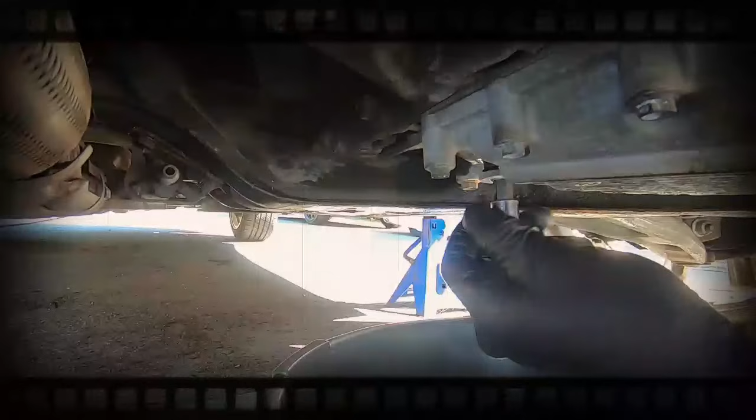Today we're going to be replacing the CVT fluid, dropping the transmission pan, cleaning it, and checking the internal filter, as well as replacing the external transmission filter on this 2014 Nissan Maxima. This should fall in line with any 7th gen Maxima, which is 2009 to 2014, so let's get into it now.

Alright guys, so we are under the hood here. These 7th gen Maximas did come equipped with a dipstick, which is right here. Now you can't just pull this thing up, it has a locking tab which has to be released in order for this to come up. So I do want to check the fluid, I do want to look at that before we do anything.

This is a 2014. It's 2024 at the time of this recording, so this vehicle is 10 years old. The mileage is 101. I don't know the history of this thing, I'm doing this for a friend, but I'll get into reviewing fluid intervals and all that at the end of this video.

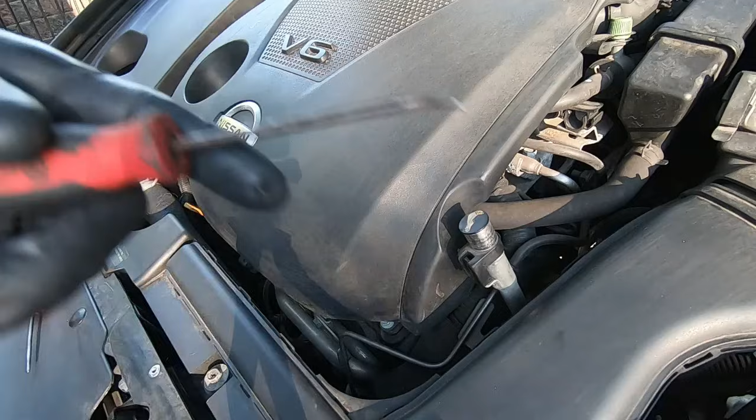But for now, the first thing we want to do is get this tab released so we can check the fluid. Alright guys, so what I have is the angled pick here. I've had success using this on other CVT tabs like this on Nissan. So what you do is there's a little tab in the inner part here.

On the inner side there's a little tab, and if you can see, I'm pressing it out. I don't know if you can see that clearance, that's me pressing it out. So now that I have it pressed out, let me see if I can put the camera down here, and I should be able to pull this thing straight up with that tab pressed back. It's slowly coming out guys, it's really fighting me. Jeez, that thing did not want to come out.

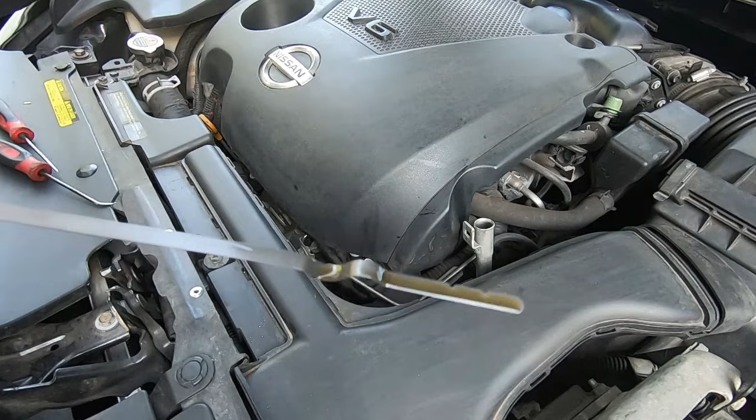Got it guys. Alright guys, this thing actually has fluid on it. We are going to check the fluid correctly, I'm going to review that in a minute, how to accurately check the fluid. But like I said, we did want to get this out because it is a pain. So just initially, we can see that there is fluid on here. I would go out on a limb and say it's original.

It's pretty dark, it smells like Nissan original NS2 or NS3 fluid. It has, if you've been around these fluids, they have a scent. Looks like it too, because this is about the color it would be if it was deteriorated and dark. So yes, I would go ahead and say that this is original NS2 fluid.

What I want to do is put this back in reverse guys. You don't want to put this back in with the locking tab on, because it's just going to lock itself again and it's going to be a pain to get back off. So put this on with a 180 turn and put it back that way so you can just easily pull it back out.

Now I'm going to be replacing this fluid as Nissan's factory service manual for this vehicle outlines. So if we look here, we're going to start with checking the fluid. Obviously we see we got some fluid on the dipstick, which is a good sign. Yes it is dark, but at least there's fluid on there. That's better than nothing at all, or pulling it out and it's dry.

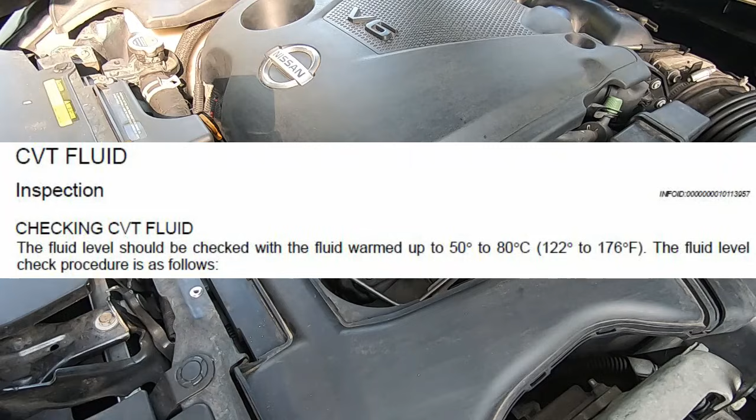So we're going to go ahead and start with the CVT fluid, checking the CVT fluid from the factory service manual. It says the fluid should be checked with the fluid warmed up to 50 degrees to 80 degrees Celsius, which is about 122 to 176 Fahrenheit. The fluid check procedure is as follows.

Okay, first it says check for fluid leakage. I haven't looked underneath of this thing, but just from a quick glance up top and looking down in here and everything, I don't see any fluid leaking, but we'll address that when the time comes.

But it says, with the engine warmed up, drive the vehicle in an urban area when the ambient temperature is 20 degrees Celsius or about 68 degrees Fahrenheit. It takes about 10 minutes for the CVT fluid to warm up to 122 to 176 degrees Fahrenheit. So if the car has been sitting for some hours, or sat overnight and the car is cold and you just came out and started it up, you would probably have to drive about 10 minutes if the temperature is roughly 68 degrees outside.

CVT fluid is widely affected by ambient temperature, which is the outdoor temperature. So if it's like 40 degrees outside, there's a good chance this fluid is going to be that when it sits overnight. 10 degrees outside, the fluid's probably going to be about 10 degrees. So let's say it's 30 degrees, you'd probably want to drive for about 15 minutes.

Now, there's also another way to check the fluid if you have an OBD2 scanner capable of reading CVT fluid temperature. You don't have to do that. Nissan gives you the option to check the fluid in that wide range of 122 to 176 degrees, and they simply suggest driving it around to warm the fluid up.

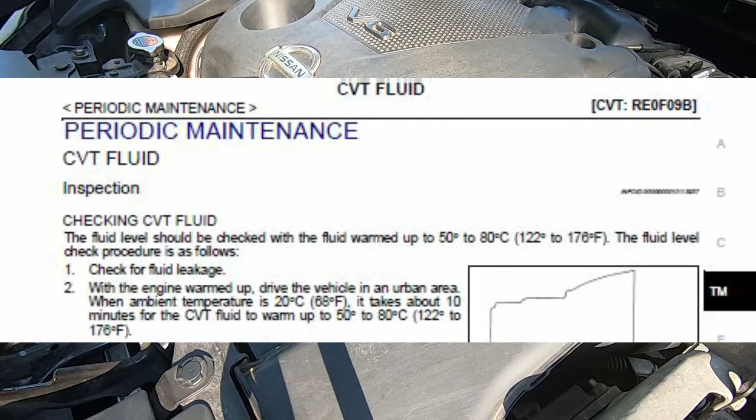However, I am also going to check the fluid temperature with an OBD2 device, just to get this as accurate as possible. I'd like to use a scanner to read the CVT temperature from the computer. If you look at my other CVT fluid video for the Altimas, the factory service manual actually recommends you look at the temperature and drain it and adjust it according to temperatures. So yes, you can drive this around to warm the fluid up before checking it.

Also, in addition, use an OBD2 scanner to check the CVT fluid, guys. So I'm going to do that now.

There are multiple OBD2 scanners you can use that would read CVT fluid temperature. If you had a high-end OBD2 scanner like an Autel or a Snap-on or something like that, it would be capable of doing it.

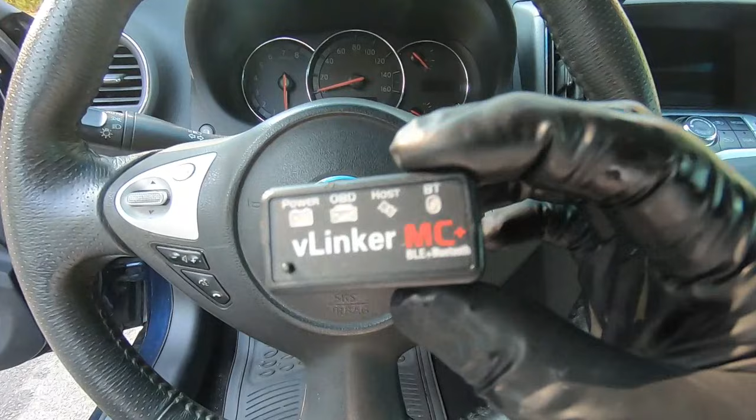What I'm going to be using is a Bluetooth BLE Plus device partnered with the car scanner app. I used a Veepeak BLE Plus scanner in my Altima CVT video - I actually left that in my girlfriend's Altima just so she has it, so if anything ever pops up she can plug it in and tell me what the codes are. I also have this vLinker MC Plus BLE Plus Bluetooth device. So you could use the Veepeak, or something like this. You just need a BLE Plus compatible Bluetooth device for OBD2. You can get these on Amazon, eBay, wherever. You need one of these to partner with the car scanner app in order to read CVT fluid.

So I'm going to go ahead and plug this into the OBD2 port. It's going to be right here underneath of the steering wheel.

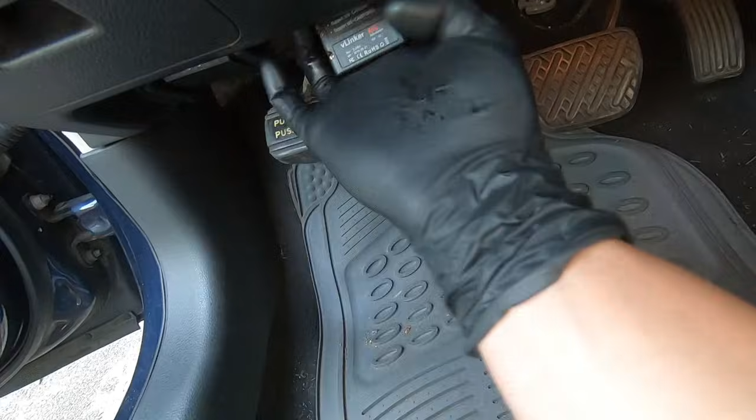All right, guys, got that plugged in. I'm going to go ahead and turn this to the on position. And now I can go to my phone and pull up the car scanner app and we can check the fluid temperature.

And just for reference, there is the mileage. Like I said, I don't think this has ever been changed before. Don't know the history on the car - my friend literally just got it. It's 10 years old, 101,000 miles on it. And like I said, just from the looks of the fluid, it looks like it's never been changed.

But we're going to go ahead and pull open the car scanner app here and we'll see what the fluid temperature is. All right, guys, hopefully this is looking okay on the screen here.

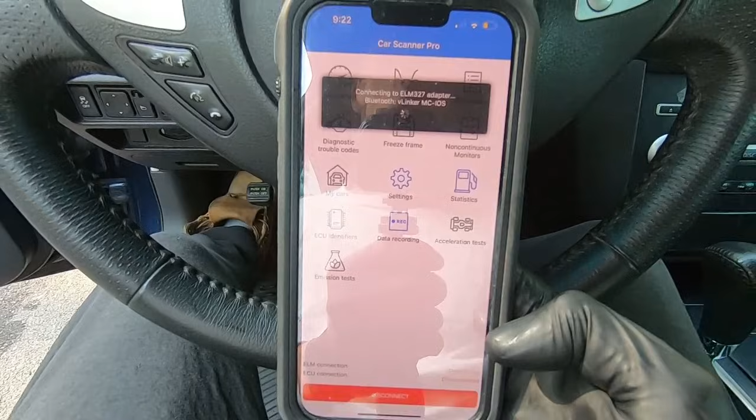So first thing you're going to do is connect the device. This is looking for either my Veepeak or my V-Linker. It is currently looking for the V-Linker, obviously, because that's what we have plugged in. But you could connect multiple Bluetooth devices in the settings and use multiple profiles for different cars on this app. This app is pretty legit - you can read a lot of live data, you can see any OBD2 code. It's pretty good.

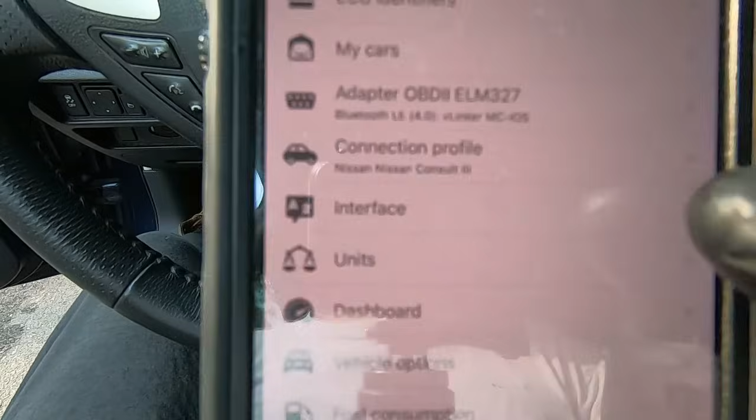All right, so we're going to first go to settings. Now you could choose the connection profile - you can choose what type of car it is. Like for the Altima, it'll say Altima CVT 2013 plus. You can also choose Maxima in the connection profile, but don't use the Maxima profile here because it does not read the fluid temperature.

If you're using the Car Scanner app specifically, go to settings, then connection profile. Do not choose Maxima, choose Nissan Consult 3. Consult is Nissan's OBD diagnostic equipment, basically their version of diagnostic tools. So use that profile, Consult 3.

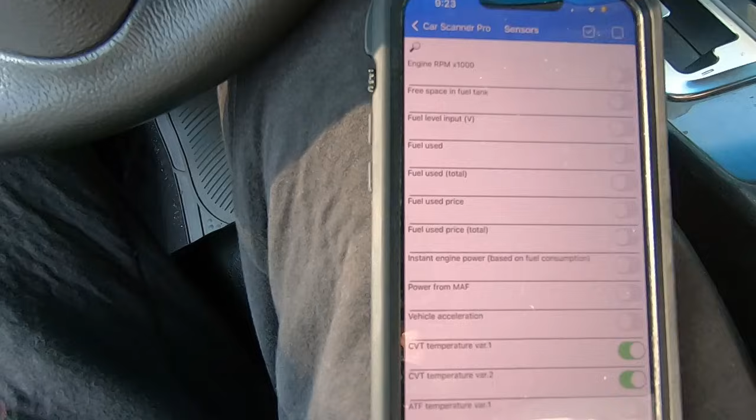So you can see we are connected up here. Now that we're connected with Consult 3, I'm going to go to live data. This shows you everything you can look at, multiple readings the computer brings up, voltages of different sensors, all that stuff. At the very bottom we've got CVT temperature variant 1 and CVT temperature variant 2. I selected both of them.

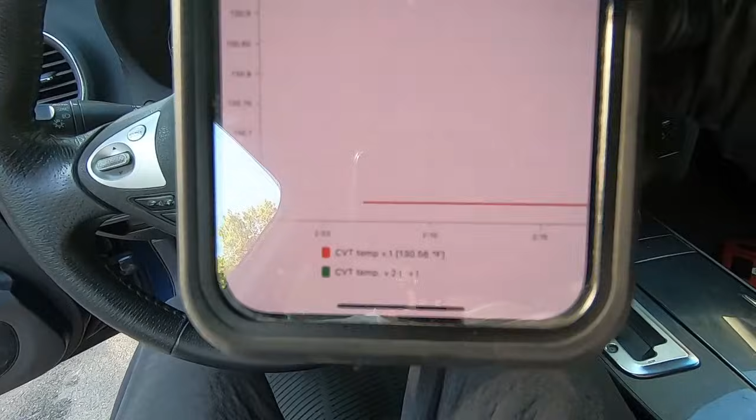It doesn't look like the bottom one reads anything, from the few times I've tried this. I did try this before to see if it worked before deciding to record. But as you can see, variant 1 is getting a reading. It's kind of hard to see, but it's at 130, okay guys? So we are at 130.

Now, like I said, this thing was driven for at least an hour to get here, so obviously the fluid's warm, that's why it's in this range. But if this car sat for 8-10 hours overnight, it would probably be close to the temperature outside, and right now it's about 70 degrees outside. So if this was cold, it'd probably be around 70 degrees because it's close to the ambient outdoor temperature. Now you can see it just slightly dropped a hair, so it's cooling off.

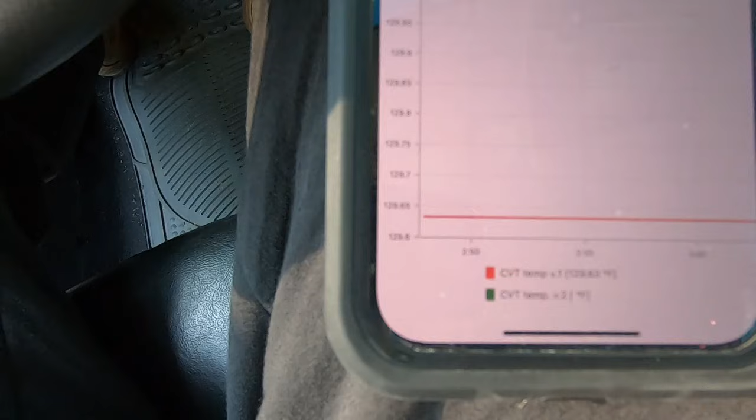Now, as it says in the factory service manual, you can drive this for 10 minutes if it's cold. You just need it in a range from 122 to 176, and that's a pretty wide range. So really they just want the fluid warm, but I'm going to get super specific since I have the opportunity to do so with the Car Scanner app. I'm going to get it exactly in between 122 and 176, which would be about 149.

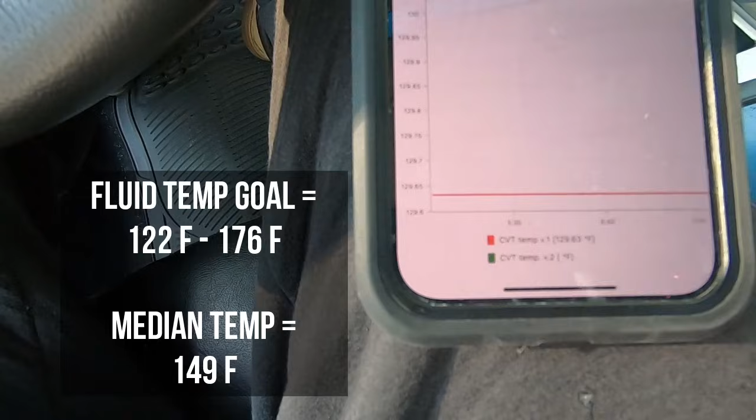So my goal here is to get the CVT temperature at 149. That's where I want to check it, and I want to also check it when we're done at that same temperature to make sure we get an accurate reading, keeping the data and temperature the same across the entire procedure. Just to keep it easy, we're going to keep it at the same temperature. It makes it a lot easier for reference. So that's what I want to do, guys.

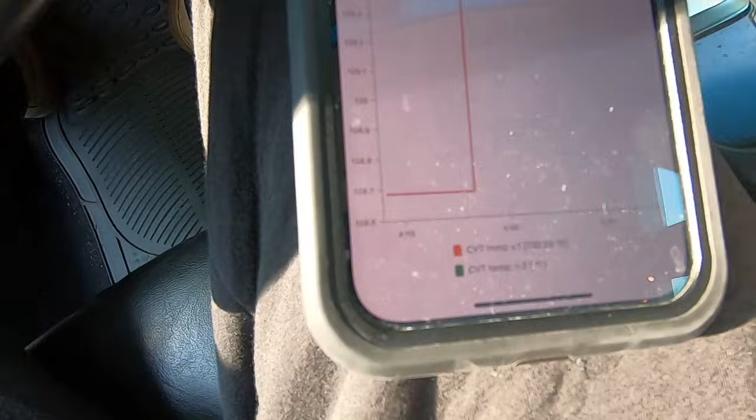So what we're going to do here is I'm going to start this thing up. Now if I start it up, it should probably start slowly climbing in temperature. It might take a few minutes to get to that point. I want to see how quickly it'll warm up, since it should just warm up at idle at this point from how close we are to 149. But I'll check back with you guys in a minute to see exactly how much this is warming up, because it's not even been a minute yet, and we're already up to 131. I'll be back with you in a minute and we'll see where the temperature's at.

Since this was already pretty much warmed up, I let it sit at idle for like 5-6 minutes and we're already at 148. So I didn't even have to drive it in this specific case, just because it was pretty much already warmed up. So we're at 148, probably 149 any second, guys.

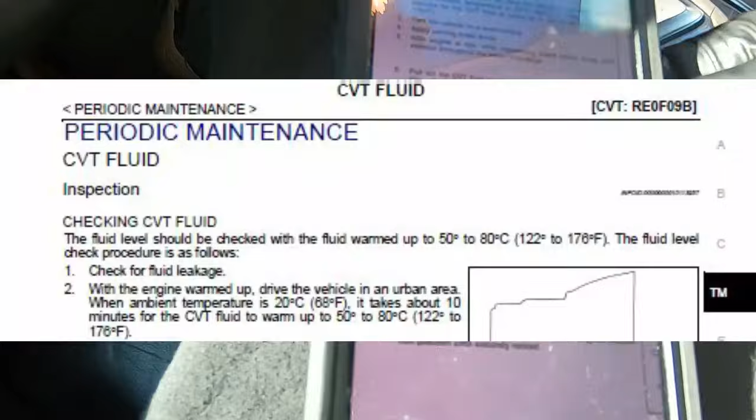So what we're going to do is take it back to the factory service manual. Now we've got the engine warmed up between 122 and 176, and as I said, I went right in the middle at 149.

So then it says park the vehicle on a level surface. If you've got a level driveway, you're good to go. I don't, mine's kind of on an angle, so I just put a jack under the front to get it even. So the car's, in my case, on a level surface just from jacking it up a hair. But if you've got a level surface, you're good to go.

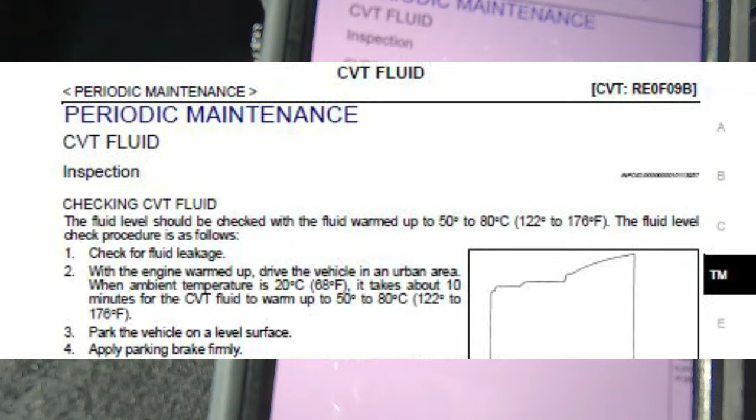Next step, number 4, apply parking brake firmly. I've got the e-brake on, so we're good there.

Number 5 says with engine at idle, while depressing the brake pedal, move the shift selector through the entire shift range. So I've got my foot on the pedal. We're going to go through each gear with about a 5-second wait in between, going all the way from drive to neutral to reverse to park, throughout the entire range, all the way down, all the way back up.

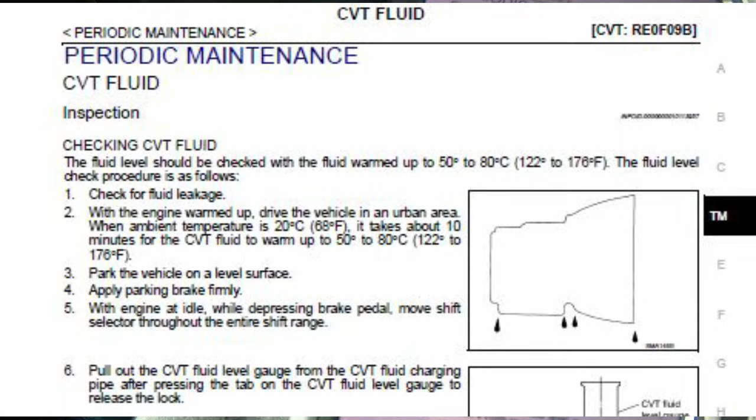Now we're going to go ahead and check the fluid, because number 6 says pull out the CVT fluid level gauge from the CVT charging pipe after pressing the tab on the gauge to release a lock. Well, we already released a lock because we're smart, so we don't have to go out there and fight with it for 5 minutes.

So we're going to get out of the car and see where our fluid level's at. Might be hard to tell, but I've got the car even just with a hair of jacking on the jack point. I'm going to put the camera down, pull out the level, and we'll see where we're at as far as the fluid level on this gauge at the correct temperature.

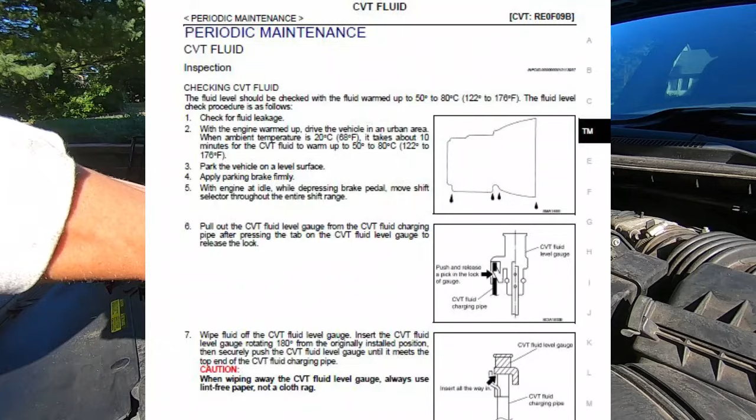So let's pull this dipstick out, wipe it off, put it back in, and we'll get our reading here.

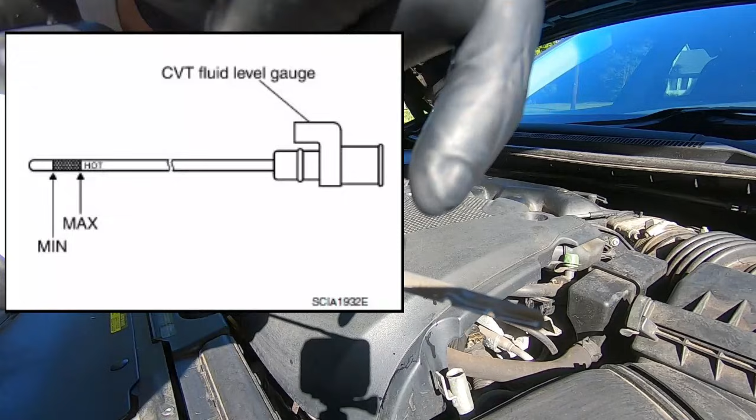All right, so it looks like we're within spec. Really, this cross-hatched diamond pattern is within spec. Right now this looks like we're getting fluid to about that point. So it does look like the fluid's in spec, and we're obviously going to check this again after we replace it to make sure it's in spec. But this is a good gauge to start off to see where we're at. Yeah, we're getting fluid pretty much all the way to the cutout right here.

All right, go ahead and put that back in reverse, don't let it lock in again. We still have to pull that out a few more times before this job is over. So now we're going to turn the car off and drain the fluid.

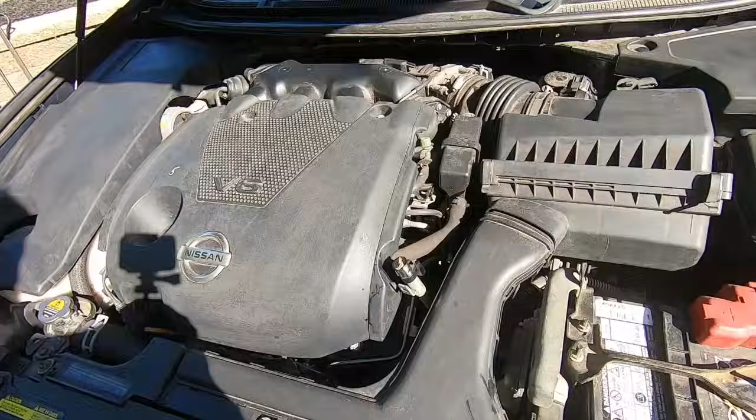All right guys, we just checked our fluid at 149 degrees. So now we've got our reading, we've got a gauge of where we're at. We're going to go ahead and drain the fluid now.

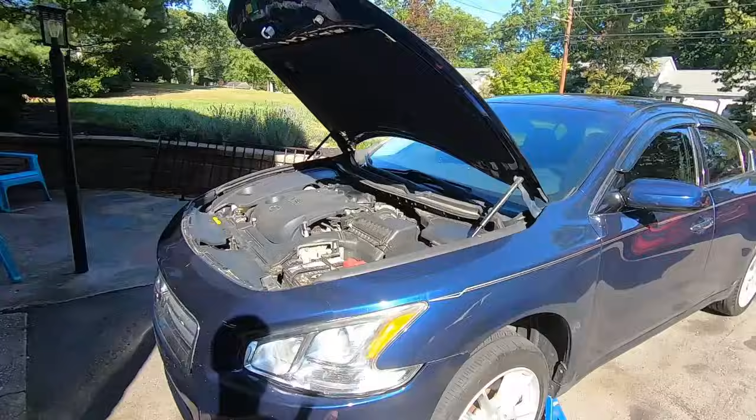So I've got the car jacked up on jack stands. You want it to be as even as possible. Like I said, I do have a slant in my driveway, so with me just putting this car on jack stands in the front, it actually evens it out. Instead of it being on a ramp coming down my driveway, when you put it on jack stands, it evens it out. Get it on a flat surface, and you can pretty much tell that this thing is even and flat with the jack stands on it. So with the front end in the air, in my case, I've got it even.

Car is even, so we want to go ahead and get under here. You want to come on the driver's side. The transmission is on the driver's side, and there is our transmission pan right there. That pan with all those lines in it, that is the transmission pan.

If we come under here and look right there, that hex, that is your actual drain plug. We need to crack that loose to drain this fluid. Now that is a hex bit, you could use an Allen key, whatever, but it is a hex 10. So I'm going to put a hex 10 on a socket wrench. I have an actual socket, that's what I'd suggest over an Allen key, but you can use what you prefer. There we go guys, that is a hex 10. We're going to crack that loose, get it free, and start draining the fluid.

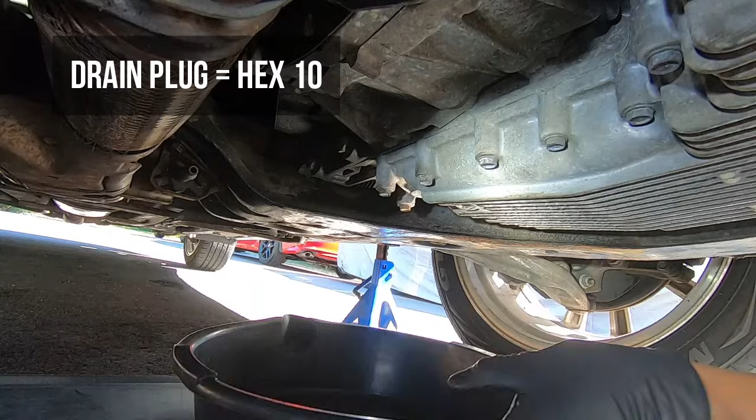All right guys, hex 10. I have an aluminum pan here on the ground for protection, and a drain pan underneath of it, nothing crazy, just trying to avoid making any messes if you can. So hex 10, I've got it on a 3/8 drive, an extendable 3/8 drive ratchet, so that should give me a little leverage to crack this thing loose. And she's pretty tight, oh wow, yeah, this thing is in here.

Oh man, yeah guys, this thing is in here. Hold on, I think I'm gonna have to grab out the half drive on this. All right guys, I'm gonna grab the 1/2 inch.

Really don't want to go this aggressive here, but gee, this thing is stuck. She does not want to budge. Oh man. Not good.

See, the thing is with this, I don't want to strip it because it's a hex head. I wish it was not a freaking hex head. You gotta tread really carefully with this, guys. This thing's definitely never been done before because this is not budging.

All right guys, I'm stripping the living crap out of this hex head. I would suggest buying a new drain plug. I should have thought of that when I did this. I forgot that these are hexes and not sockets.

So I'm really trying to get this thing hammered in. So what you want to do to avoid stripping this is get it in perfect, give it a couple even hammer blows. Pray for the best here. This is like my last shot on this, so if I don't get it, I'm screwed.

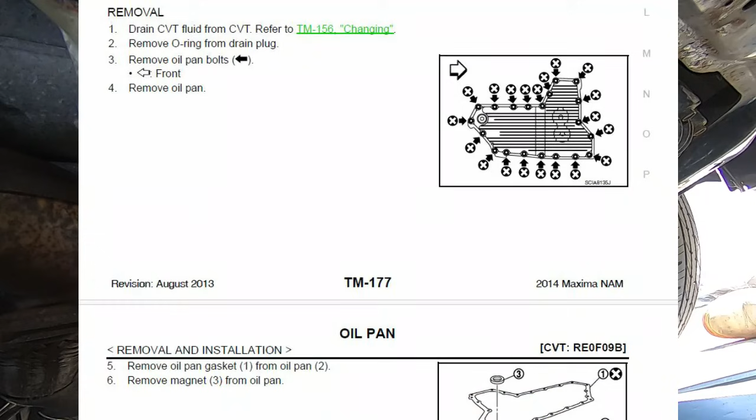All right, guys, I'm going to go ahead and get into dropping the pan, okay? So, if we're looking at the instructions straight from Nissan's factory service manual, they aren't too detailed. Pretty much, it says, removal and installation, removal. Drain CVT fluid from CVT. Obviously, we've already done that. Remove O-ring from drain plug. We will get into that. And then it says remove oil pan bolts, then remove oil pan, okay?

So, no specific order or anything this needs to be done in. They just need to be removed. There are 20 bolts surrounding this, okay? So we got 20 10 mil bolts all around this, holding this oil pan into the CVT, all right? 20 10 mils. So what I'm gonna do is I'm gonna take a 10 mil on a 3/8 drive socket wrench, and I'm just gonna crack all these loose, guys.

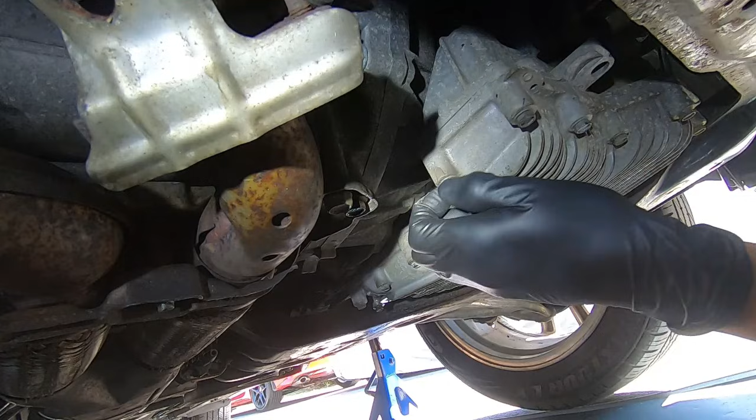Now, could you use a small impact or something of that nature to get these out? You most certainly can, all right? I prefer, with something like this, to tread safely and just crack them loose with the socket wrench, just to be careful.

Now, one thing I do want to note is it says these are one-time use and to buy new bolts. You could do that if it makes you feel better. If you look at forums, many people who have done this before me reuse these bolts. They don't look like anything fancy, could be torque-to-yield, I don't know, man, but we're going to reuse them. I've reused them on other Nissan applications and never had an issue. So we are going to reuse the bolts. If it makes you feel better, you could buy 20 new bolts as recommended by Nissan.

So let's go ahead and get the rest of these off. I'm going to crack them all free with a 3/8 drive and a 10 mil, and then I might just fire them out with the impact, just my preference, and then we'll get the oil pan off.

All right, so I got all 20 of these loose. What I'm going to do is fire these out with the impact since I broke them all loose and none of them felt trouble, they all felt okay. I'm going to leave the 4 corners in here loosely - this one, this one, this one, and this one back over here. Take the rest out just so we can separate this without making a complete mess once all of them are removed. We'll separate the oil pan from the transmission with these 4 still in, and then we'll drop the oil pan. So we're just going to go around, fire all these out with the impact, and then we'll get this pan dropped.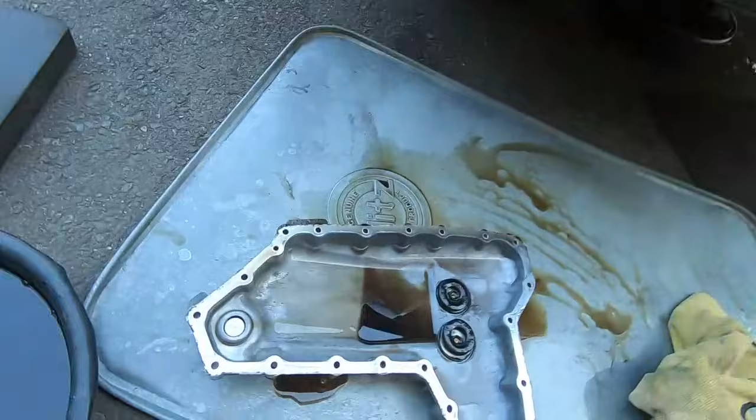All right, guys, so our pan is off. I just dumped the oil that was left over in the pan into my drain pan, and you can see this oil is pretty dark. Definitely looks like original NS2 fluid, so I do believe this is the original fluid.

You see how dark it is. We got probably a little bit more than 5 quarts out now, considering that we dropped the pan, and we are going to lose a little bit more fluid when we do the filter on the side of the transmission, which is the external filter. So definitely suggest at least getting 6 quarts of NS2 in order to ensure you have enough fluid to accurately fill this up and get the fluid level right once you're completed and replace the fluid.

Now, if we're looking at this, it's pretty clean, guys. I don't see any really metal shavings anywhere. I mean, there's a little bit of stuff here on the magnets, of course, but it's not a mess, man. It's really not. And we should be able to go ahead and pull these bad boys up here.

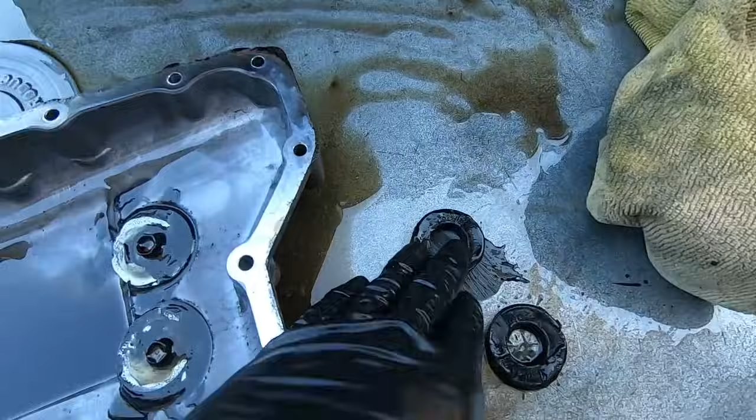Yep, 1 and 2. Definitely want to clean those things up. But I mean, guys, they're at 100K. I'm not mad at this, man. It looks pretty good. It's actually pretty clean considering. So yeah, looking good, guys. I don't see a bunch of mess, a bunch of shavings.

So really what we need to do here at this point is clean everything up. We're obviously going to be reinstalling the pan. I got a new gasket, so we got to clean the mating surfaces up, both on the transmission itself and on the pan. We'll clean the magnets, get all this cleaned up, and then we'll get this reassembled, guys. Now, before I do that, I will touch base on the filter, the internal filter that is in the transmission pan, guys. So let's go ahead and get under the car real quick. I'll touch base on that, and then we'll get this back together.

All right, guys, so inside of the transmission, hooked to the control valve, there is this filter that is surrounded right here, with these 10 mils and this neck right here. That neck is what sucks up the fluid. So that is a filter. According to Nissan, this filter is non-serviceable. In fact, they go to great extent to even hide this filter. You can't find this filter from Nissan themselves anywhere.

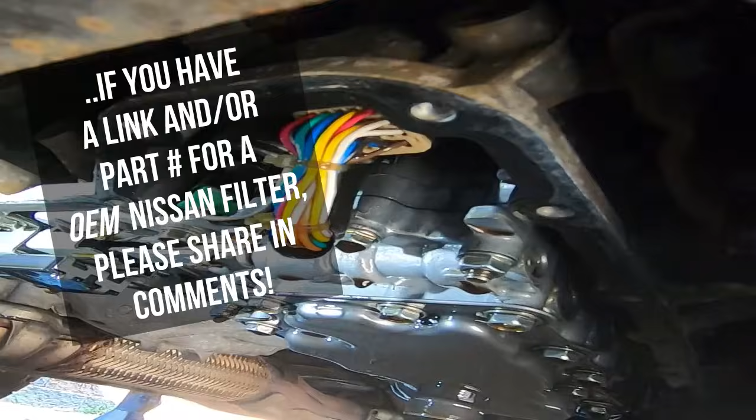Now, I did a good amount of research on this. I put some hours in, and what I came up with is I found one listing on eBay for this filter, and it's the only Nissan part number I found associated with this filter. I don't even know if it's real, but upon looking at it now, comparing it to this filter in the transmission, it looks real.

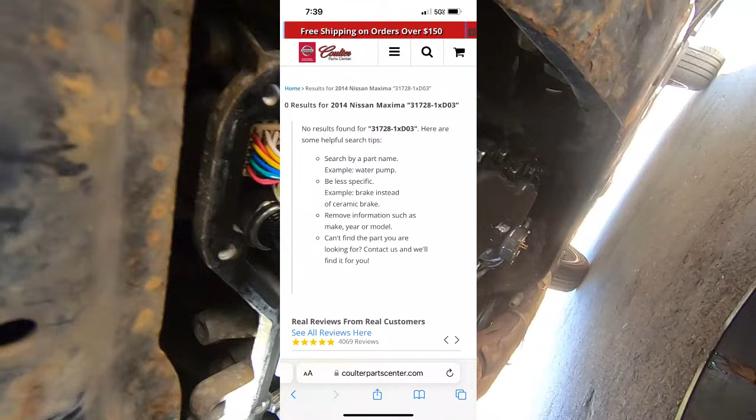Now, they have the part number here listed at 31728-1XD03. Now if you Google search this part number, or if you search the part number like on an OEM part site like Coulter Parts Center, for example, it does not generate this filter. Coulter Parts Center is the parts site where I get all my OEM Nissan parts from, and when you put in 31728-1XD03, it comes back with 0 search results.

Now, also, just upon searching and looking at other sites, I would put this part number in, and it would bring up the new filter for like the Altima transmission with NS3 on some other sites, and that part number is almost identical. It's 31728-1XF03, but that's not the filter that we're looking at right here. So either, when you're searching that OEM part number for this specific filter, it either generates no results or it brings up the newer filter, which isn't this filter.

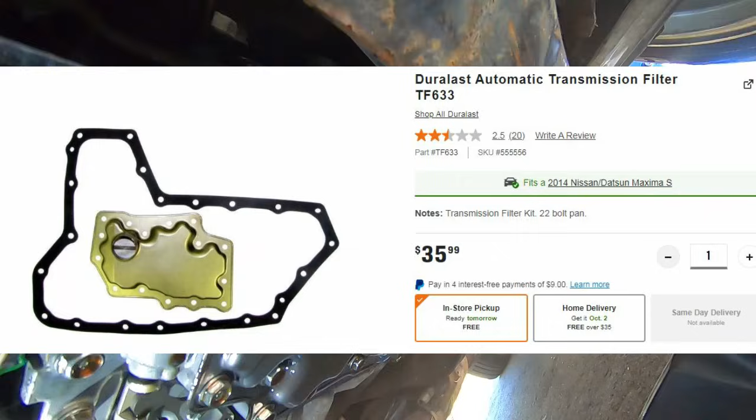Now, as far as the aftermarket, you can get these filters on Amazon. You can get it from like an AutoZone with a transmission filter kit, but they are not right. Now, if we're looking at this from the side, do you see how slim this neck is coming out of it? If we look at various different aftermarket options of this filter, these necks come down way far, like it's almost double the length. And that is a huge problem.

And if you do some research, you can see on forums, people have replaced these filters, and then the transmission won't shift because the neck is so long, it pins itself up against the transmission pan, and it can't suck up fluid. Okay, so I did find on one forum, and you know, I saw it and I should have screenshotted it, and of course I spent like an hour trying to find it again, and of course I can't find it.

I did find somebody who replaced this filter with an aftermarket one, and of course it was too long, but they cut it themselves accordingly. They probably just took a Dremel with a cutting wheel and cut it to the right size. You could do that if you want.

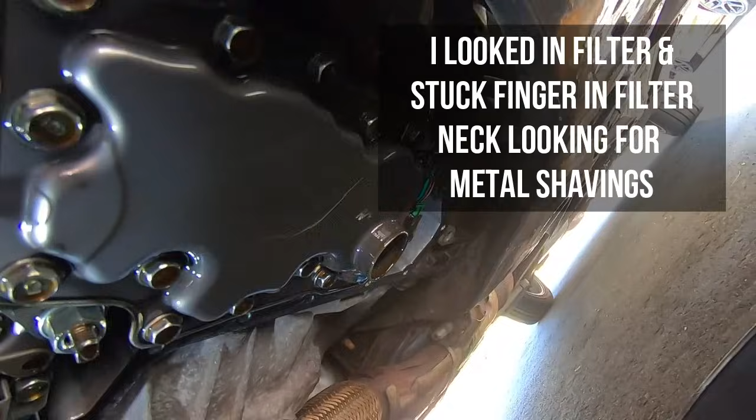Me personally, I'm leaving this alone. This isn't my car. It looks pretty clean in here. I don't see any metal shavings or anything that looks really out of place or bad. So I'm not messing with this filter. I'm not taking it down. I'm not cleaning it. I'm not messing with it.

If you want, you can drop it and clean this particular filter up. Now, if I could get the OEM Nissan filter, if I could literally search that part number and get that part readily available, I would probably swap it. But since it's not, and all the aftermarket ones, no matter where you get it from, have a neck that's too long and won't fit, causing the transmission not to shift, I say leave it alone, okay?

Like I said, if you want to drop this and clean it, be my guest. This isn't my car, so all I'm getting into is cleaning the pan and the magnets, and I'm leaving this filter alone. So this internal filter, that's my two cents on it. I put in a ton of research, and that's what I came up with. Take it for what it's worth, and do what you feel comfortable with. Not my car — I feel comfortable leaving this in. Everything else looks good. I'm just going to clean the pan and leave this filter in, but there's some insight as to the internal filter.

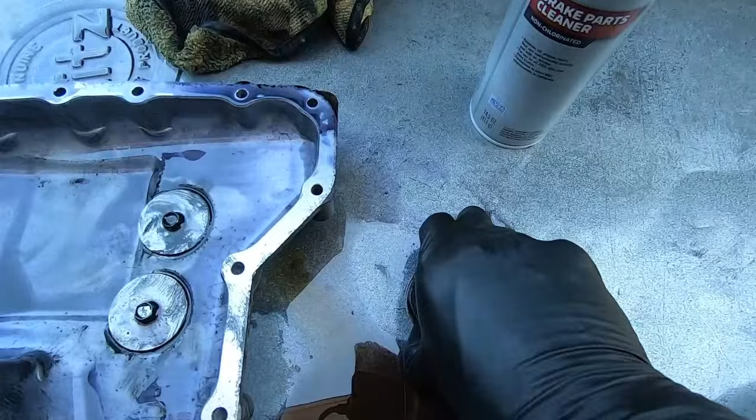All right guys, so we are back to the pan. I'm going to clean this pan up and the magnets. You can use shop towels, paper towels, microfiber. I'm going to get in here with some brake cleaner, clean this all up, get it real clean, spray it all down. We're going to clean these magnets up — they're kind of stuck here to my aluminum pan, but I'm just going to wipe all the debris, gunk, and nastiness off of them, then spray them down. We'll clean this up, spray it down, put it all back together, and then we just have to clean the transmission side, and then this is ready for reassembly, guys.

So I'm going to go ahead and get this cleaned up. Brake cleaner, towels — really all you need. Let's get this clean and we'll get into the next step.

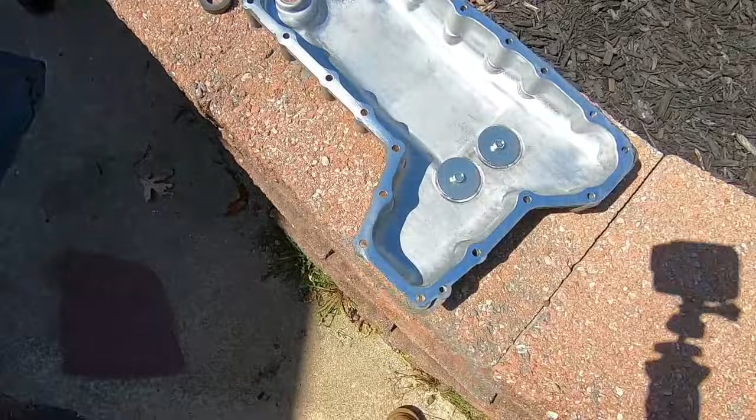All right guys, so I got the pan here, the magnets and the bolts all brake cleanered and wiped down. Just brake cleanered it, wiped it out with a microfiber, came out pretty good. Now you do want this to dry really well, make sure it's dry as a bone. It even says in the factory service manual to make sure all moisture is removed from the pan before putting it back together. So definitely letting this sit out in the sun just to make sure we got no residual fluid, brake cleaner, whatever in there, just to get it as best as possible.

Now, one thing to finish this off is I'm going to prep this mating surface. You can see there's just a hair, a little bit of gasket material and stuff on these edges. What I want to do is take some red Scotch-Brite, and I'm just going to go around the entire edge with this, with a little bit of degreaser in it. You can use brake cleaner, degreaser, whatever you prefer. Just want it a little bit wet, damp, and you can see it's taking it right off. That's how I'm going to go around the entire edge of this pan, and then it will be completely prepped and ready for install, guys.

So I'm going to go ahead and go around this edge with red Scotch-Brite, and this pan will be ready, good to go, ready for installation.

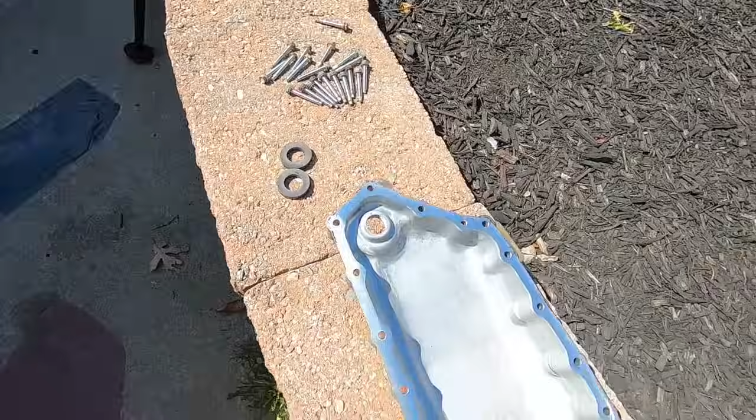All right guys, I got the mating surface here for the gasket on this pan all squared away — red Scotch-Brite the entire edge. Now you might see a little bit of oxidation here. It's nothing at all, nothing to be concerned about.

It's just a little bit of oxidation. There is no gasket material left behind, and that's what you want to go after. So there was a little bit here like you saw that I was working on. That's what you need to get off. The gasket material itself, I got all of it off here with some red Scotch-Brite. So pan is good to go.

I'm going to sit here and let the bolts, the magnets, and the pan marinate in the sun just to make sure it's dry, no moisture. And now we're going to go ahead and get under the car, clean up the mating surface on the transmission itself, and then we'll get this back together, guys.

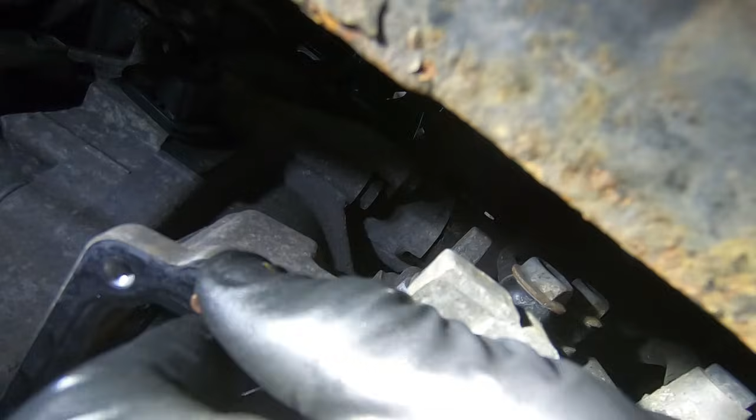All right, guys, we are back under the car now. We need to get this mating surface here on the transmission itself all squared away. Now, the gasket itself did not come off with the pan. It's actually still here on the transmission, and if you can see, probably maybe around this dowel or something. Let me see. Yeah, you can see it's on there. All right, so let me see if I can get a better angle here. You can see it coming off.

So I'm going to try to get under here with a plastic razor blade and get this separated all the way around, and hopefully I can get this thing off in one piece because I don't feel like fighting it and scraping it off all the way around.

All right, guys, so let me grab a plastic razor blade. I would suggest having some. They're great for many different automotive applications, guys. Plastic razor blades are always your friend when you're doing gaskets and scraping off material and things of that nature. So I'll see if I can get this separated and we'll see where we're at, guys.

All right, guys, let's see what we got here. Yeah, I got the plastic razor blade underneath of it, guys. So if you can see, I'm kind of just guiding it around underneath and just pushing it through as I go along. It's going to be a tight edge right here. Might have to turn it back to the razor blade side, but I'm going to just try to get underneath this entire thing. See how I'm going along the edge with it?

All right, she's going. All right, guys, I dropped my blade around that dowel. I did get it off around that dowel just by a light pull. Don't go crazy, just give it a light pull. It's a little tighter over here on this driver's side of the transmission, but this thing's coming, guys.

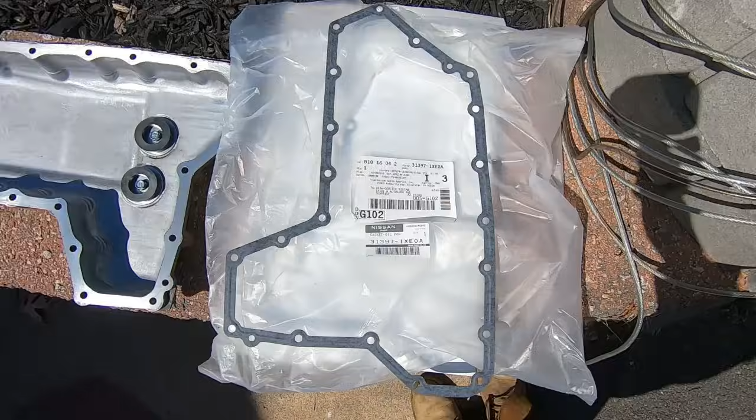Now, of course, you need a new gasket to go back together. Here is the OEM new gasket for our pan. As you can see, it is a perfect fit. This is an OEM Nissan gasket. Good to go. Here is the part number: Nissan 31397-1XE0A. That is the part number for the new gasket. So that is our new gasket. Pan is ready to go, magnets installed.

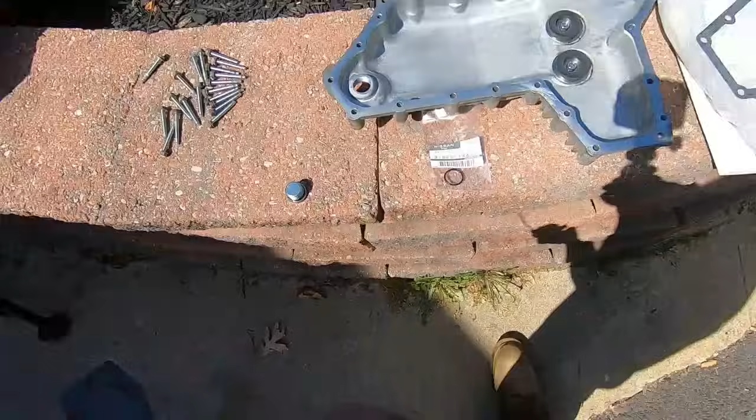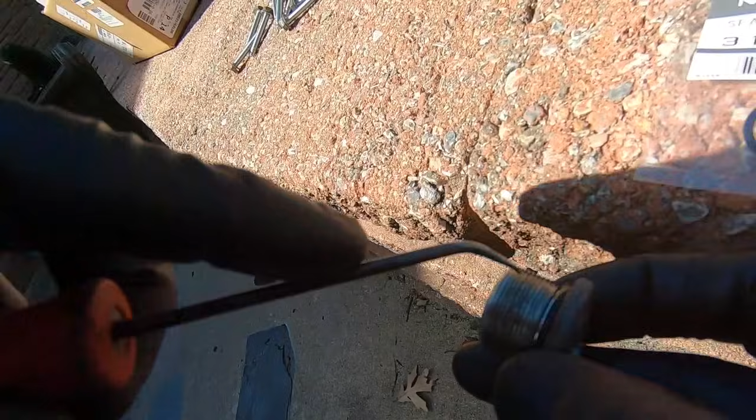Let's get this thing back together. One last thing we're going to do before we put this pan back in is put the drain plug back in. I'm just going to loosely tighten it. I'm going to torque it to spec once we're done, but if you notice, this does have an O-ring on it, which is basically the washer to prevent leaking from the drain plug. You definitely want to replace this, so we're going to get the old one off. I'm just going to take this angled pick, get behind it, and pull it off. There we go, old one off, and here is the new one straight from Nissan.

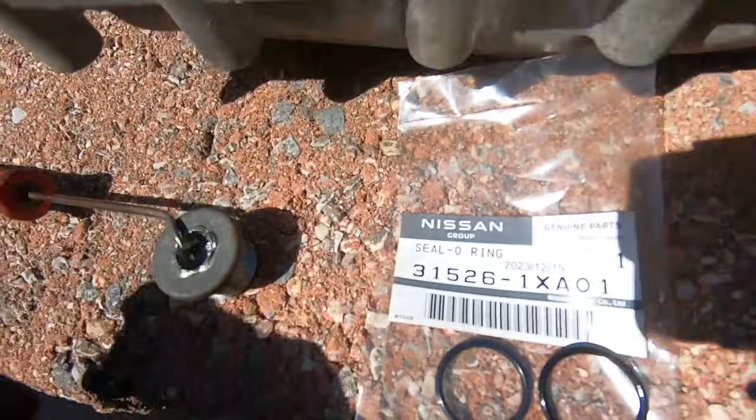As you can see, it's the same thing. Part number 31526-1XA01. That is the OEM rubber washer for the drain plug. We're going to go ahead and get this thing on, right over the body of the drain plug, and we'll be good to go. New washer here, just gonna get it to go over the body of the drain plug, right back into the bottom portion there.

It does recommend putting CVT fluid on that. You should always lubricate O-rings anytime you put one in, no matter the application. So I'm just going to put a little bit on my pinky and lubricate it, and we'll get that thing screwed in finger tight. Just a little bit of CVT fluid on that for lubrication, and I'm just going to finger tighten this bad boy back in.

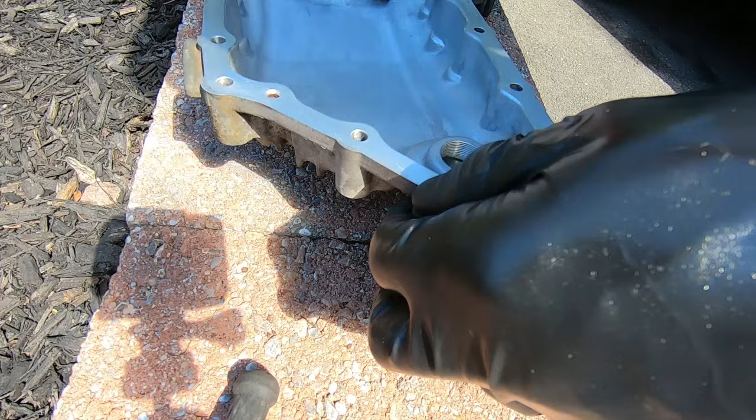I would definitely suggest getting a new drain plug. I did not order one for this job, and I surely wish I did, because I definitely chewed up that hex head, but it is what it is. I'll get it right, and if I ever have to get it off again, I'll be able to do so. But definitely, just for a fresh start, buy a drain plug. Wish I had one and I didn't get it, so I'm just finger tightening this in by hand, and I'll torque it once it's on the car. There we go, finger tight, and now the pan is ready for install.

All right, time to get this thing back together. I would recommend going around the edge one more time just to make sure that edge is dry and good to go, ready for installation. You can use a shop towel or a microfiber, just go around that edge. Now you're probably going to have fluid consistently dripping out of that neck there, it's pretty much unavoidable. Also, fluid likes to come right back here, so right where my finger's pointing, you need to make sure you get a microfiber up in there and dry it good. You might have to do it more than one time.

So what I'm going to do is drop the gasket onto the pan, and I'm going to mock it up, and then we'll push that pan back up onto the dowels and start threading in finger tight all of our 20 bolts. Got to work quick here.

All right guys, I'm going to put a bolt right here in the corner. That's how I'm going to start this thing off. Try to get it finger tight, get it going. All right, I got that in there. I don't think it's right, but nonetheless, it's in.

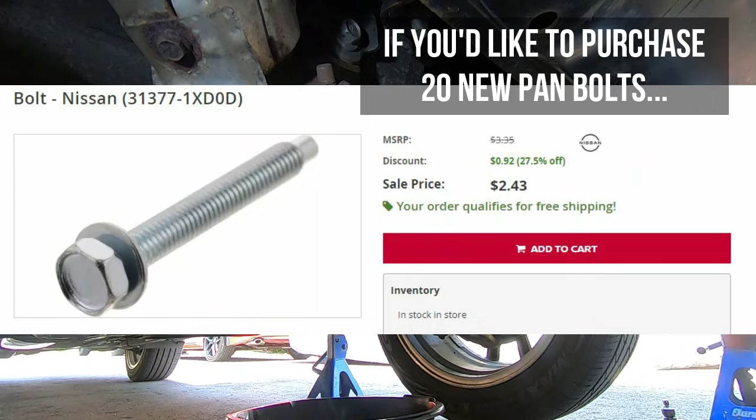Okay, it does say do not reuse the oil pan bolts. I already touched base on that, I'm reusing them. I'm sure some expert in the comments is going to tell me how the CVT is going to fail on the head, guess it's going to blow up because I reused these 10 mils, but all good. I see no issue. And like I said, if you do your research on forums and actually put in some time, you'll see that other people have done this successfully with reusing these bolts.

Now it says tighten the oil pan bolts in a crisscross pattern to the specific torque. So anytime you don't have a specific torque diagram that has each bolt numbered, you just crisscross the pattern on whatever it is. So in this specific instance, there is no specified torque sequence with the outline diagram, it just recommends to do them in a crisscross pattern.

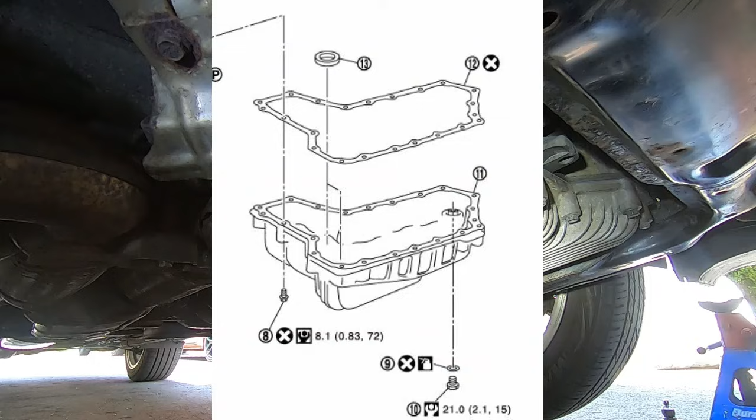So here is the blowout from Nissan's factory service manual. Now the torque spec for these 10 mil transmission pan bolts is 72 inch-pounds. So we're gonna go ahead and go in a crisscross pattern, torque each of these to 72 inch-pounds, and we'll be good to go as far as this pan's concerned, guys. So let's go ahead and get this thing torqued to spec.

All right guys, so what we're going to do is basically just be going diagonal, caddy corner to each opposite bolt. So I'm going to start here in this corner closest to the passenger side, almost at the center of the car, 72 inch-pounds. I'm going to come up to the front here closest to the driver's side, get this one to 72. Okay, torqued. I'm going to come back to this back one here.

So I'm going to come back to this one back here closest to the driver's side on this corner, get this one torqued to spec. Torqued, and then we're going to come up to this front one right here closest to the passenger side and get this one torqued to spec, 72. All right, so now I'm going to go to this middle one here in the back.

And you'll notice probably some of your finger tightness getting a little bit looser now that you're actually pulling it in with torque. So it just needed a eighth of a turn more with the hand so I can have a good start to this torque. So let me get this one going.

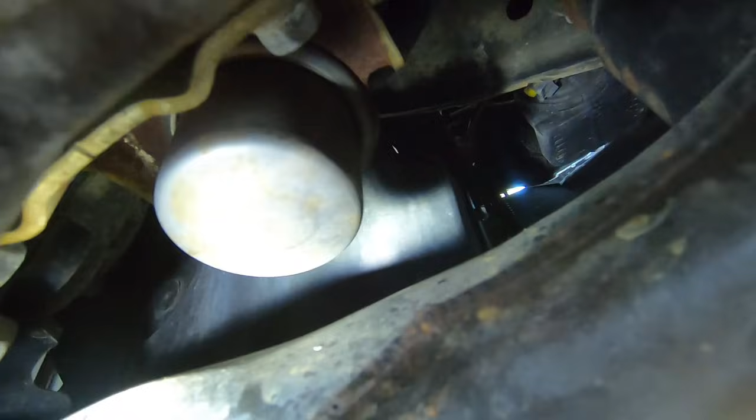Okay, so before we get into it, I'm going to go ahead and show you where it is. Now if we come next to the transmission pan, I'll put some light in here. You can see right there, that is a filter for the CVT, an external CVT filter. So what we're going to do is get to that real quick, and then we're going to get that replaced. Then we'll have this job basically done, and it'll just be time to replace the fluid, guys.

So we're good to go. Let's get to the driver's side, and we'll get this external filter replaced. All right guys, so we're going to replace that external transmission filter. Okay, so we are here on the driver's side of the car. We need to remove the wheel in order to access it.

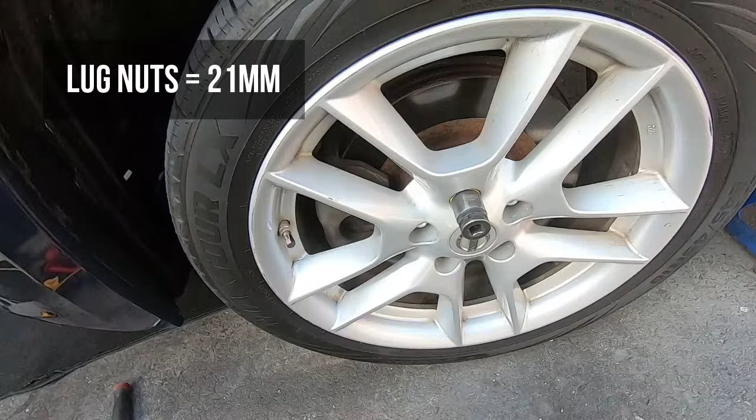Okay, so the lug nuts here are a 21 mil. I just have a 21 here on the impact. As we know, the car is already jacked up, so we're good to go. I'm just going to fire these 21s out with the impact, and then we'll be good to go, guys. I'm going to get all 5 of these out, and then we'll get this wheel off. All right guys, wheel is off.

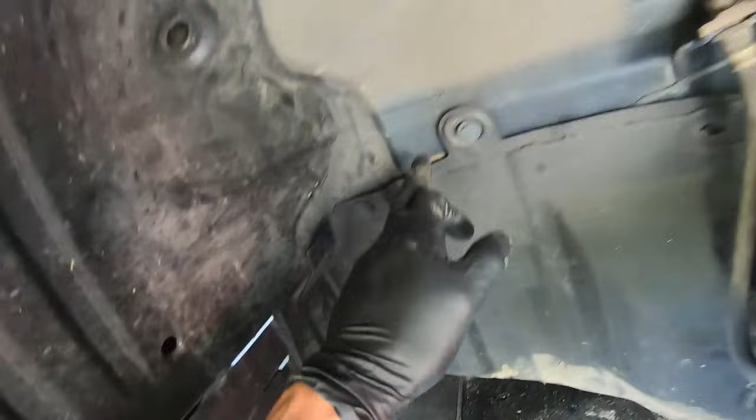Now the filter is right here in this vicinity, so we're going to have to remove this splash guard panel in order to access it. Okay, now this thing is held in with 6 push clips. Now this one is missing a couple, this thing isn't in the best condition, but I got 1, 2, 3, 4, 5, and there's a 6th one here on the bottom. So I'm gonna go ahead and get a panel popper and we'll pop out these push clips and get this splash guard right off.

All right guys, just got a panel popper here. We're just gonna come in here and get in on these clips, just get behind them and pop them right out. Nothing crazy, just got to get behind the clip or regular push clips.

All right, so there we go guys. I'm just going to get the other two clips this one has out and we'll be good to go. Got that last one out, panel is off. So there's that one that's going to be on the bottom as well, you can see it right there.

That should have a clip as well. Like I said, this thing is not in the best condition, it's definitely missing some clips. So now we can see our filter right here guys.

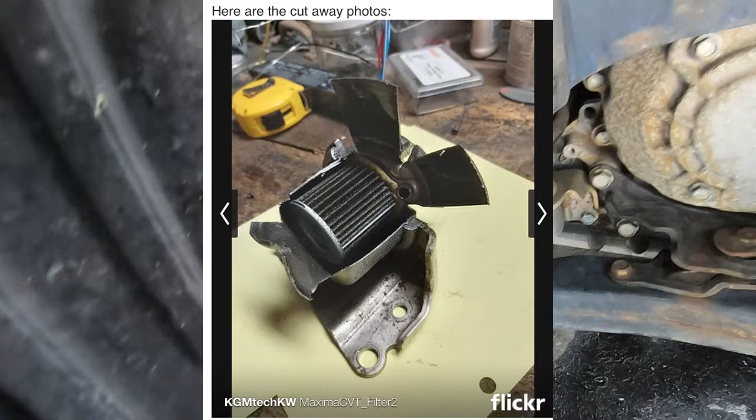So that is the external transmission filter, and just for reference, thanks to forums, this is a pic I found where somebody cut this filter open and you can clearly see there's a filter inside this. So really this is just like a housing, you know what I mean? Just an aluminum housing that a filter is actually cased in. So this is just a casing around the filter, as you can see.

So there we go guys, this is an external CVT filter. I do have the part number from Nissan, so we're going to go ahead and get into getting this thing off and then we'll get it replaced guys. So let's get this thing off.

All right, so this external filter here is held in with a few 12 mils, okay? But before we worry about removing it, I do want to remove these hose clamps going to it first, so that way we have the stability of it being in place to get those off accurately.

Okay, so as you can see, I got a pan here. You want to put a pan underneath it because we're probably going to lose some fluid. So get a drain pan underneath it there and we're going to go ahead and get these hose clamps off.

All right guys, so I just got some decent sized pliers here. We're just going to go ahead and grab onto the tabs, slide that bad boy back. This one on the top is in a little bit worse position, so what I want to try to do is see if I can spin this bad boy. Yes, I can, good stuff. So if you take your hand and just spin that, you should be able to spin it to get it in an orientation where it's easier to remove.

I'm just going for ease of removal at this point, I'm not trying to shove a small plier up in that angle because they had it at a bad angle, so I'm using a different tool now. I got some needle noses, so you can use whatever you want guys. I used the fatter ones on the first one, whatever works for you, your preference.

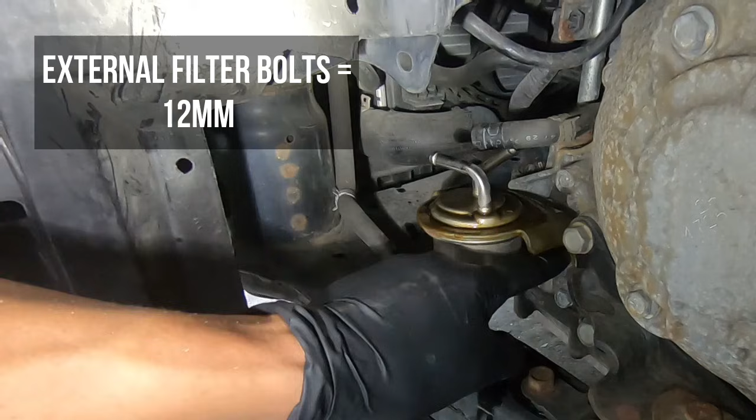All right, pretty much all that fluid is out, guys. So there are three 12 mil bolts holding this thing in. You got one right here, one right above it, and then there's one here on the bottom side on the left if you're looking directly at it. So that's three 12 mils.

All right, so I'm going to start with this one here closest to the front. Now I wanted to use an impact to get that off, although I don't think I could sneak it in here against this fender liner, and I don't feel like taking this fender liner off just to be lazy and use an impact. So I'll use an impact on those two. For this one right here, I'm just going to use a socket wrench. You can use any tool of your choice, whatever you prefer, impact, socket wrench, whatever you choose, guys. So let's go ahead and get this thing broken free.

Yep, there we go, got it going with this socket wrench here. All right, go ahead and get this thing off here. Knocking my pan all over. All right, feels like she's coming on out. So this one should be good. Then we'll fire out our two remainders here on the right side of it, if we're looking directly at it. And then we'll have this filter free.

There we go. All right, guys, so we're gonna get these other two here. On the bottom one here, 12 mil. Out. And then we got the top one. Out. All right, guys, filter is free. Should be able to go ahead and grab her. And there it is, guys. Old filter off. All right, so let's go ahead and get the new one on.

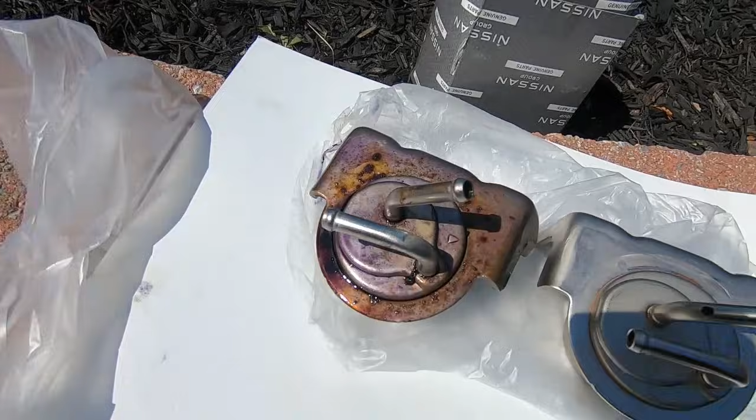All right, so here's a little old versus new action here. So that is the old filter. There's a new one. You can see they are identical. All right, guys, so here is the part number. This is an OEM Nissan filter, so it's going to be 31726-1XE0A. All right, so there is the filter, guys. Good to go. Let's get this thing installed.

All right, guys, so I cleaned up a bit in there, just put some degreaser and wiped it down. Probably going to get a little bit of fluid still dripping, but that is to be expected. So what we're going to do is guide our filter back in. I'm going to guide this guy in here, and I'm just going to start this bottom bolt here in the closer to the rear corner.

All right, so got that thing started and going in. Just going to get it going a hair. All right, so that's started. I'm gonna go ahead and get the one on the other side closest to the front started. So I'm gonna hold it up and do the other one. All right, guys, I got this one going now too. So I'm gonna go ahead and get that thing threaded in a little bit by hand here.

So now get our last one here on the top end, and then we're just gonna fire all those in and snug them down. All right, guys, I got all those started. So what I'm going to do is just fire them in and snug them down. All right, nothing crazy, just going to sit that up straight as it's intended to be.

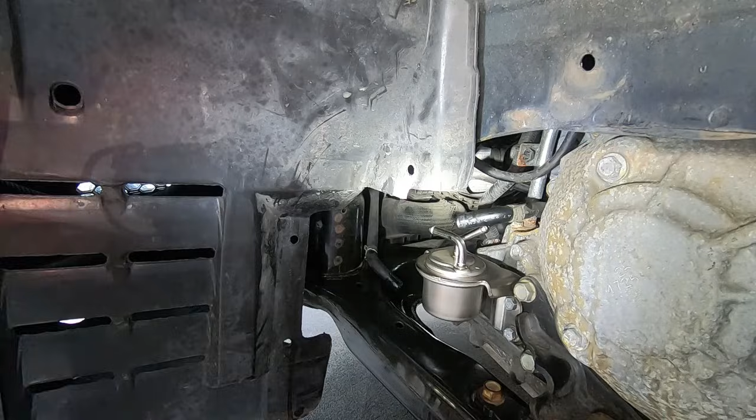And then we're just going to lock them in with the impact on those two. Keep in mind on the front one, I could not sneak my impact in there, so I'm going to have to do it with a socket wrench. No big deal though, I'm just going to get it snug. So let me go ahead and get that one going here. And I'm right there, and that thing is snug, guys. Good to go, feels really good.

Okay, so now we can go ahead and get our hoses back onto the corresponding spot, so it's quite obvious which one goes where. Just slide it right back into position here. All right, so I got the top one on, this bottom one.

Jeez. All right, there we go. We got both of those on, guys. So now we just got to get our clamps back into place.

Now when it comes to clamps, if you notice, there is an indentation here on the hose where the original clamp was clamped. You do want to get it back in those indentations for the best possible secure connection, because if you just randomly put it back on, there is a chance it can leak. Is it going to 100% leak? Not necessarily. You can definitely do it successfully in another position, but I would suggest getting it back into its original indentation for best possible results. So that is what I'm going to be aiming for.

Let me go ahead and grab this one here. Kind of put it back a little too far, but we're going to get it pulled back forward here. Get it down the body here. And I'm going to grab my other pliers here, the little thicker ones. I'm going to be shooting to get this right back where it was, guys. All right, so I got that locked back in its original location.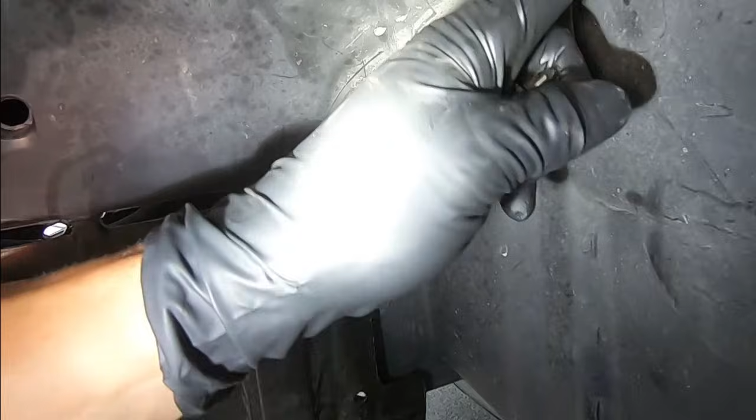So you can go ahead and grab your splash guard, get it back lined up here so we can get this thing installed. This thing has definitely seen better days, as have the clips like I mentioned, but all right, guys, so I got that back in there. I'm just going to put the rest of the clips in, and we'll be good to go. Got that panel back in the best I could, considering it has missing clips and it's not in the best condition. So we're good to go.

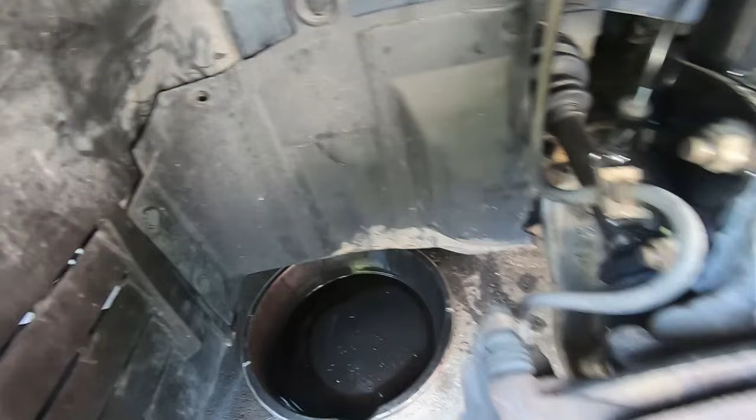That is back on. We're going to go ahead and put the wheel back on, and then we're going to go ahead and get into filling up the fluid, guys. So we are all but done. Let's go ahead and get the fluid in. All right, guys, wheel is back on. Time to come back under the hood.

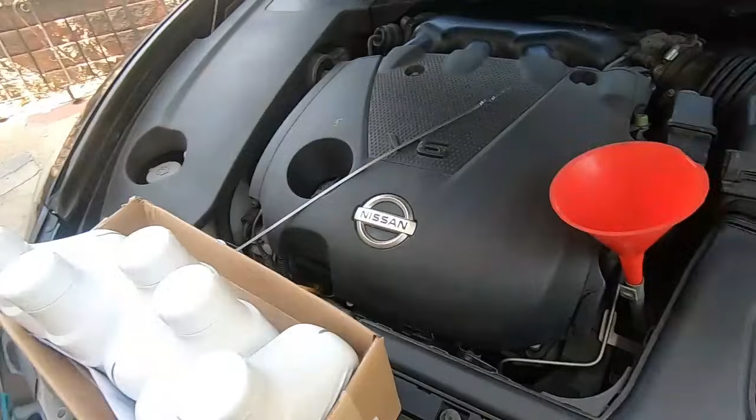Okay, so we are ready for new fluid. Took the dipstick out, just put a funnel in here. This is where we're going to be refilling from. We lost about 5 quarts, maybe a hair over, 5.5 maybe at the most. Got a little bit in there from the filters and the pan, but I would say maybe 5 to 5.5 is what we lost. I'm going to start with adding 5 quarts. It was maybe a splash overfilled, just a hair, because we were getting it on the higher part of the dipstick, reading up almost to the top when I checked it initially. So I'm going to start with putting in 5, and we're going to see where we're at.

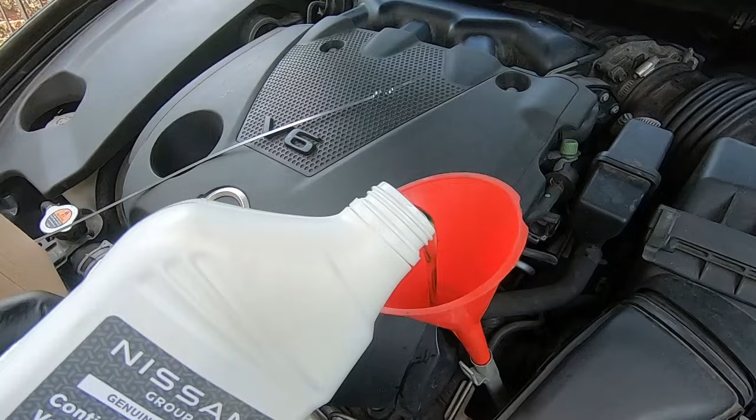NS2 fluid is what you want. Nissan NS2. As you can see right under the hood, it's what it recommends: use only Nissan CVT Fluid NS2. You look at the factory service manual, it outlines NS2. So NS2 Nissan Fluid is what we're going to be pouring up in here. Let's fill this thing up. All right, guys, we're just going to pour these in, and we'll get it going here.

All right, guys, we got that filled up, 5 quarts. I'm just going to do a quick gauge to see where we're at. This needs to be in the specific temperature range to get an accurate reading, and it should correspond with the reading we took beforehand, but I'm just doing this for shits and giggles. Looks like we got a decent amount of fluid, and it's coming up to about where it was before, even just before we ran it, guys. So looks like we got some fluid on here. Looks pretty good, you can see it, so about right there. We're going to leave it like this. We're not locking this in yet. That's going to be the last step. We'll be locking that in.

So what we're going to do now is start this thing up. I'm going to monitor the temperature. It's still on jacks, I want to evaluate the oil pan as it's running, look at the filter, and make sure we have no leaks. We're going to let it run for a bit, make sure there's no leaks, then check the fluid at the corresponding temperature as outlined by Nissan. All right, let's start this bad boy up.

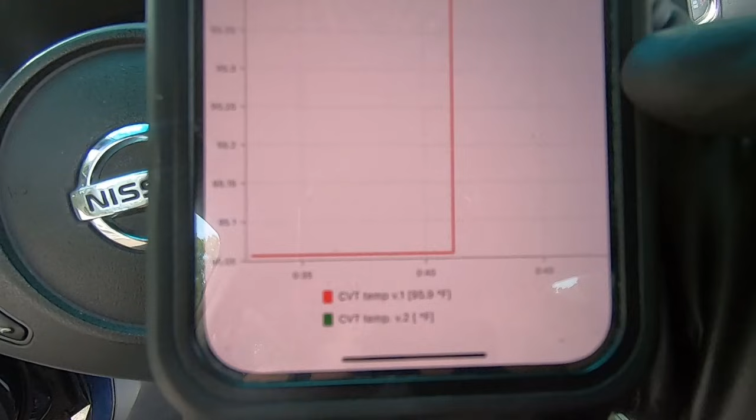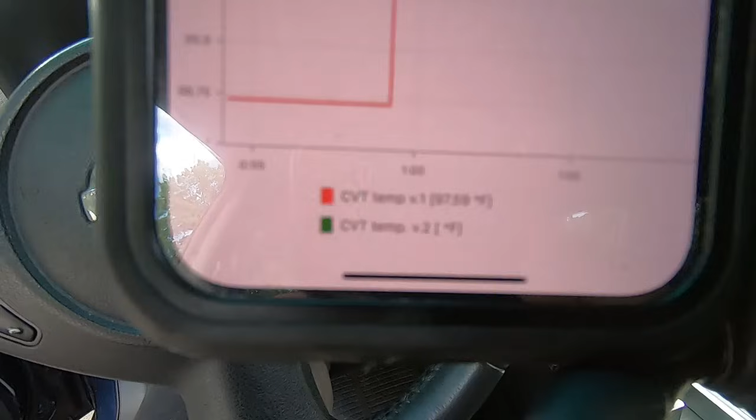Just fired it up, been running for about a minute. I was connecting the Bluetooth to the car scanner app. We're currently at 95 degrees, which makes sense since the fluid was cold. It's probably about 80 something degrees out right now, and it's been running for a couple minutes, so this looks perfectly accurate. We can see it climbing up slowly, now at 96. So we're going to let this run for probably about 5 minutes and see what the temperature gets to. Depending on where it's at, we might have to take it for a drive to warm it up to that 149 range to check the fluid.

But as of now, we're just going to let this warm up. I'm going to keep an eye under the hood at our filter and our pan, just want to make sure everything looks good and we have no leaks. We'll keep an eye out for leaks and see where we're at.

All right guys, we've been running for about 10 minutes now, currently at 130. Haven't driven it, haven't done anything, just checked under here a few times. We're looking good as far as everything we replaced and did.

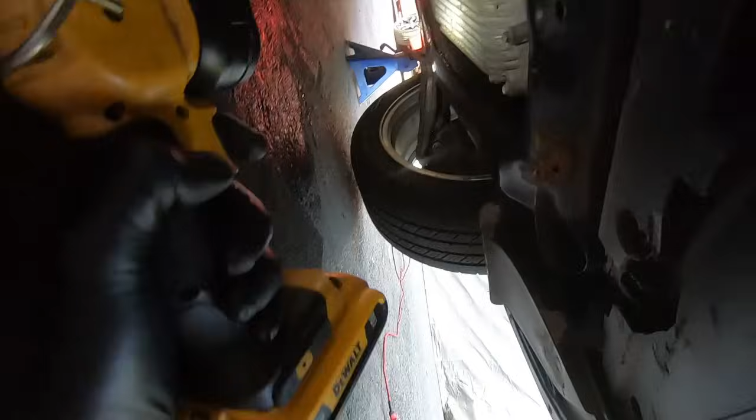So looking at the pan, no leaking around our gasket edge there, everything looks nice and dry. Getting over to the drain plug, all good, no leaking. Coming up into our filter, got no leaks coming in there, nothing dripping down, everything is dry and looking good, how it's supposed to look.

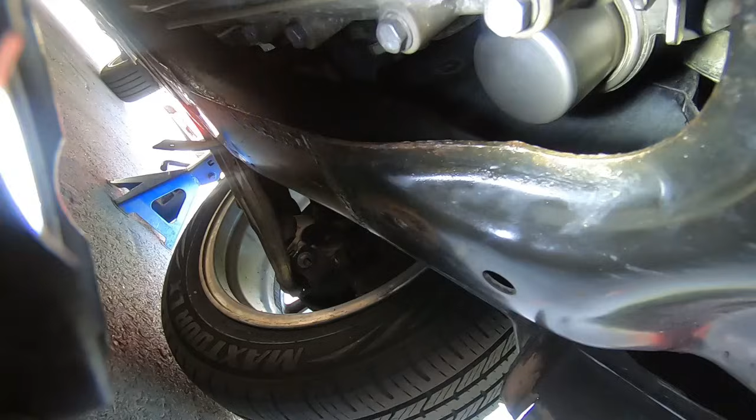So probably 10, 11, maybe even 12 minutes in, guys, this is looking really good. I don't believe we're going to have any leaks - if it was leaking, it'd probably be leaking already. It's pretty warmed up, already above the 122 range, we're at 130. So we're just going to let this get to 149, check the fluid, see where it's at, and adjust accordingly if we need to. But so far so good, everything looks dry, good to go. We'll let this run a little bit longer and see where we're at.

All right guys, after running for a bit we're at 149. So what I'm going to do is run this through the gears real quick - I didn't even have to take this on a drive. Just going to go like 5 seconds between each gear, want to make sure we feel good. Feels really good, smoothly going into gear. One more time. All right, all good guys.

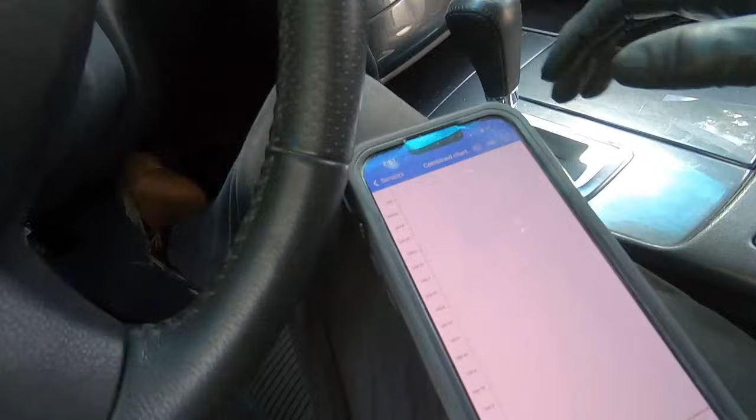We're at 149, let's go check the fluid. All right guys, we just crossed over from 149 to 150, but we are good. Let's check this and see where it's at. And it's got a little bit of fluid on there, might be a hair low. Yeah, it's a hair low, guys.

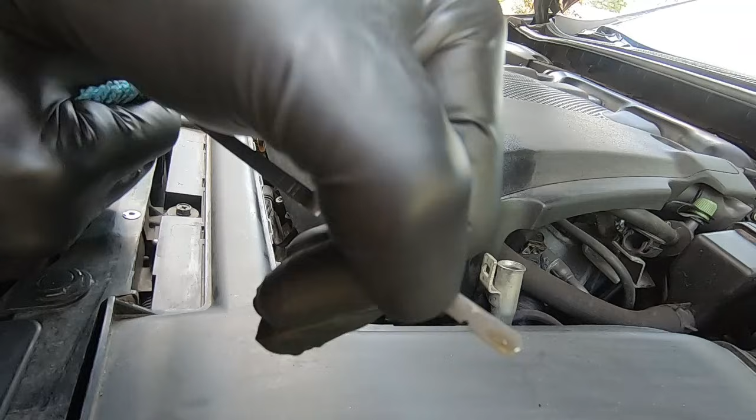You can see it's really just coming up to that first notch. So we lost a little bit more than 5 quarts, so I'm going to pour a little bit more fluid in here and then we'll recheck. I probably put about almost a half quart more in, maybe not quite. Yeah, we're at a way better level here, we're in that cross-hatched pattern. I'm going to put a splash more in there, but it looks really good, guys, that's about where we want it.

Yeah man, it's looking pretty good, guys. So it's right in that cross-hatched range, which is where it should be. Not quite as high, it's not touching this bent area like it was prior, but in my opinion I think it might have been a hair overfilled. So we're right before touching that. All right guys, so not bad at all.

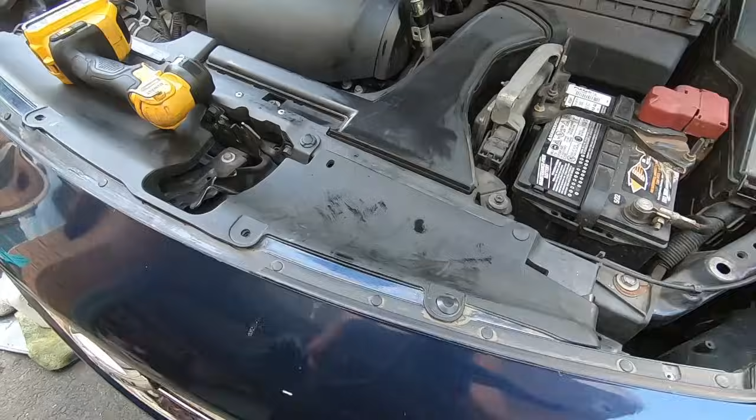If you're done with it, you can go ahead, lock it back in. If not, you want to check it one more time. Make sure you keep it at a 180 position so you don't lock it back in. But fluid looks good, guys. It's been running for a while now, especially to get it to temperature to check the fluid.

So we check one more time for leaks here. This is looking really good, guys. See no leaking from anywhere. I don't see anything coming from the drain plug. All right, nothing from the edge here where the mating surface of the gasket is. Filter dry as a bone. Good to go, guys, so everything is looking really good here.

What I'm gonna do is take this on a quick drive around the block just to make sure it feels good. I did drive it prior, so I know how it should feel, so I'm sure you'll know how it should feel as well. So take it for a quick ride, make sure everything's good. That's what I'm about to do. So we'll go on a quick ride, make sure this thing is 100%, and then we have officially done a full CVT service on this Maxima, guys.

All right guys, drive was successful. Pulling back in the driveway, all good. This thing feels great. So what we're going to do now is just review a few things about CVTs - fluid life, when you should do it, all that fun stuff, guys. So let's get into it.

All right, so as I've mentioned a few times throughout this video, I'm going to touch base on CVT maintenance. That's everything from, should I change my transmission fluid? It's been 150,000 miles, to what a CVT maintenance schedule should look like - all the above. Now first thing, what should a CVT maintenance schedule look like?

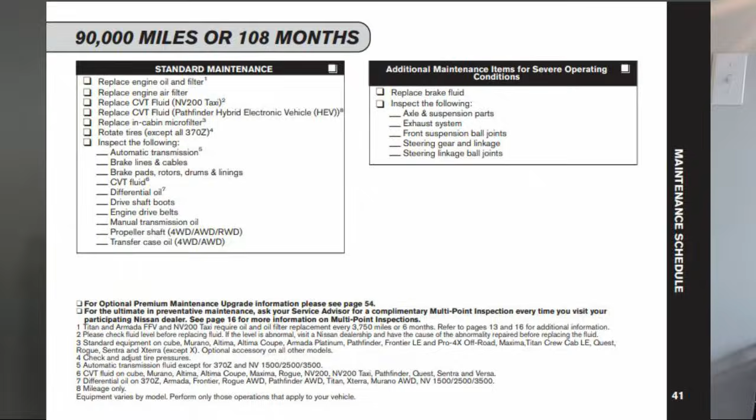Now as far as how to go about maintaining it, there's tons of opinions, but it really just comes down to replace the fluid. Now how often should you do it? Different opinions, but in my opinion I suggest every 30K. And there's multiple reasons I suggest every 30K. For example, it says to inspect the fluid every 30K - so they're not telling you to replace it, but they're suggesting to inspect the fluid every 30K. So they already kind of hinted at 30K intervals just from them suggesting to inspect the fluid.

Now there are many other YouTube channels out there that would suggest the same. Just one example, a pretty big one is Car Wizard. He has a CVT video on a Cube, and he showcased a 20,000 mile interval of how deteriorated and dark the fluid got. He suggested 30, 40, 50K in that video as well. So that's from a very experienced mechanic suggesting to get the fluid out as frequently as possible. So every 30K is what I would suggest.

As far as the filters, it's really up to you. From my experience, it doesn't seem like the fluid I've seen from CVTs gets quite as dirty as that Cube did in his video - he pulled the filter and fluid at 20,000 and it was pretty dirty. So when you do your first change, you could kind of get a gauge of how dirty your fluid is, and maybe you can make a decision from that. But here's how I would suggest the interval should look like.

It should be from 0 miles, 30K fluid change, 60K fluid change, 90K a fluid and filter change, 120 fluid change, 150 fluid change, 180 another filter and fluid change. Okay, so that is my opinion on what a CVT maintenance schedule should look like for these cars.